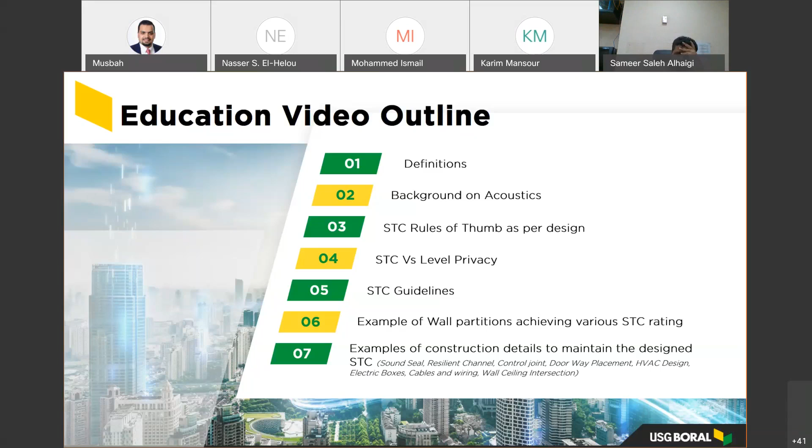However, this investment can yield important benefits such as happier tenants, higher property values, reduced turnovers and vacancies, and greater productivity. In this webinar, you will learn about acoustic definitions, background on acoustics, STC rules of thumb as per design, STC versus level of privacy, STC guidelines, and examples of wall partitions achieving various STC ratings. There will also be examples of construction details to maintain the designed STC, whether it's a seal detail, resilient channel installation detail, control joint detail, doorway placement, HVAC design details, electrical boxes, cables and wiring, and wall-ceiling intersection.

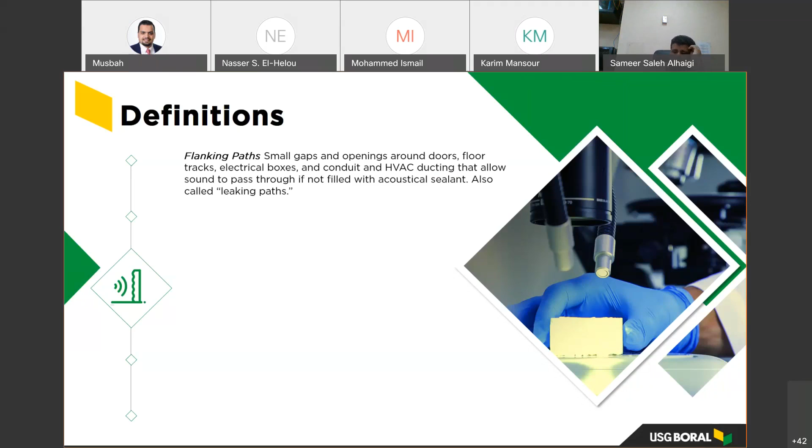Some of the most important terms and concepts to be familiar with in drywall acoustic design are flanking paths, which are small gaps and openings around doors, floor tracks, electrical boxes, conduit, and HVAC ducting that allow sound to pass through if not filled with acoustical sealant, also called leaking paths.

The second definition is the impact isolation class, also called IIC, which is the measurement of the ability of a floor-ceiling assembly to isolate sound from footfall or other impact sources, reducing the intrusion of noise into rooms directly below.

The third and important definition is the sound transmission class, which we will elaborate on more throughout our presentation. Sound transmission class stands for STC, which is the measurement of the ability of a wall or floor assembly to isolate airborne sound and prevent it from passing from one side to the other.

The frequency range to determine STC is from 125 to 4000 Hertz, and the STC is determined by ASTM E413.

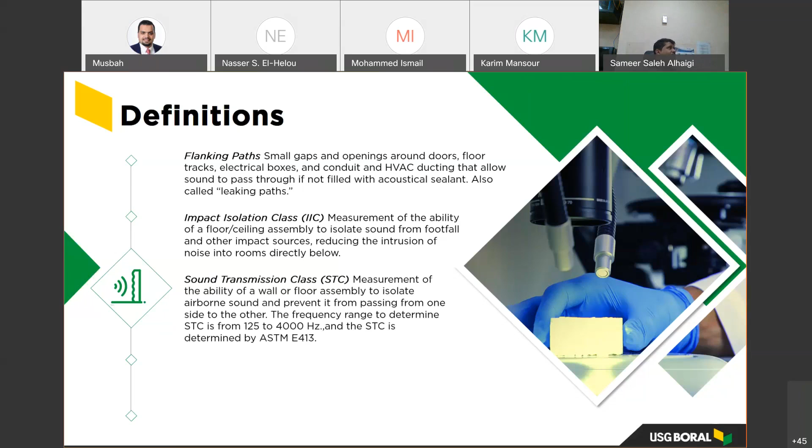RW is the weighted sound reduction index, where the frequency range to determine RW is from 100 to 3150 Hertz. From a curve, the RW is determined using ISO 717-1, and we will be giving an example of the graph and how to read the RW and the STC throughout the presentation. Note that whether a test is conducted to either ISO or ASTM, the RW or STC can be calculated.

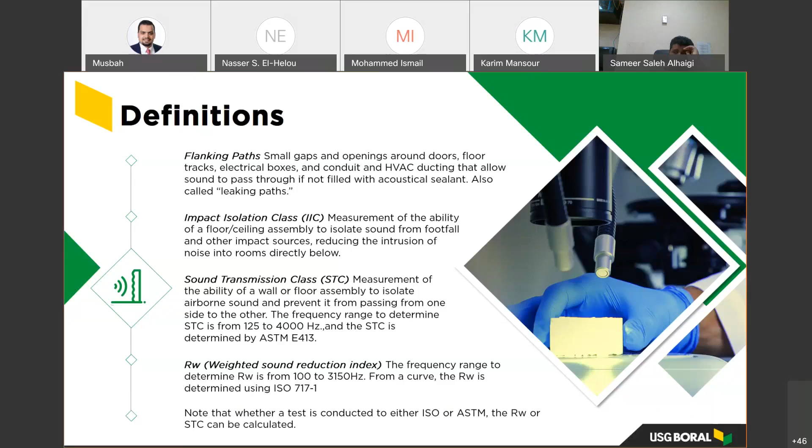While the science behind sound is well understood, using that science to create the desired acoustical quality within a building or room is complex. No single acoustical solution can be universally applied to all designs. Each environment features unique parameters the architect and designer must consider when developing floor plans, selecting materials, and designing assemblies.

Virtually every material, from furniture, wall and floor coverings to computer equipment, will affect sound to some degree. Designing wall partitions, ceiling systems, and floor ceiling assemblies for a distinctive quality of a space will achieve the most effective sound control.

Sound is defined as a vibration in an elastic medium, that is any material - air, water, physical object - that returns to its normal state after being deflected by an outside force, such as a sound vibration.

The more elastic a substance, the better it can conduct sound. Lead, for instance, is very inelastic and therefore a poor sound conductor. It's usually used in X-ray rooms of hospitals with gypsum board. Steel, on the other hand, is highly elastic, making it an excellent conductor of sound.

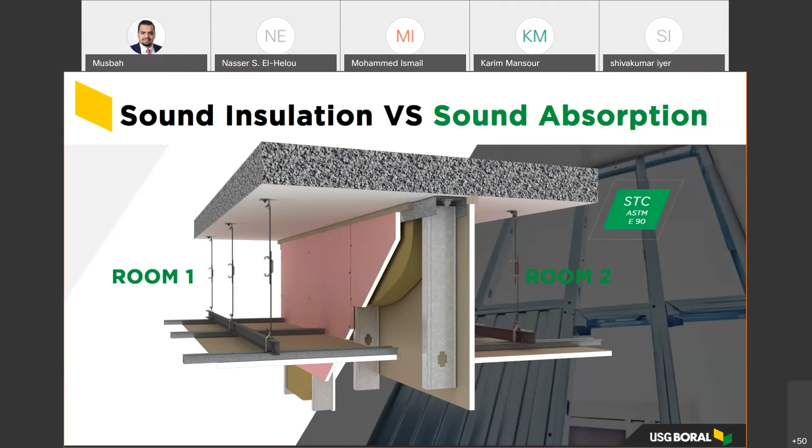Sound insulation relates to the actual reduction in sound traveling from one area to another through a wall, floor, or ceiling. Sound transmission class is the measurement of the ability of a wall assembly to isolate airborne sound and prevent it from passing from one side to the other.

You can measure these decibels using a special measurement tool. Inside the room, if you want to measure the sound inside the room, you get a machine. If you have a ringing phone and you measure it, it will give you 70 decibels, for example.

What is the basic concept of how acoustical walls work? We have already defined sound transmission class, STC, as the measurement of the ability of a wall assembly to isolate airborne sound and prevent it from passing from one side to the other.

When a wall has an STC of 25, normal speech can be heard easily. STC of 30, loud speech can be heard easily. STC of 35, loud speech can be heard but not understood. STC of 42, loud speech can be heard only as a murmur. STC 45, you must strain to hear loud speech. STC of 48, only some loud speech can be barely heard. STC of 50, loud speech cannot be heard.

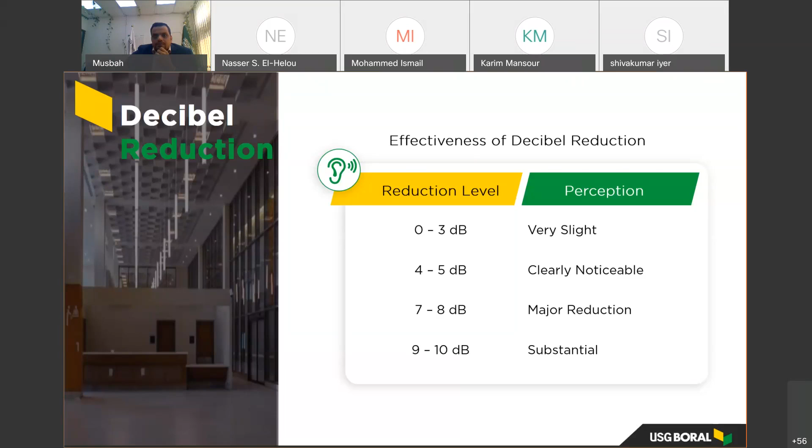If the reduction level is 4 to 5 decibels, it's clearly noticeable. If the reduction level is 7 to 8 decibels, then there's a major reduction in perception. Comparing a wall partition achieving 40 decibels to one achieving 50 decibels is a reduction level of 10 decibels, which has a substantial reduction in perception - very substantial when comparing a wall partition achieving 40 decibels to 50 decibels.

The frequency range to determine RW is from 100 to 3150 Hertz, and STC is from 125 to 4000 Hertz. In this example, at 500 Hertz, RW is 50 and STC is 49. This is a good example of why RW and STC differ. If the project acoustic specifications demand RW of 50, this wall could be offered. However, if STC 50 is required, you would need to offer a modified wall partition at a more expensive rate, since this wall partition achieves 49 decibel.

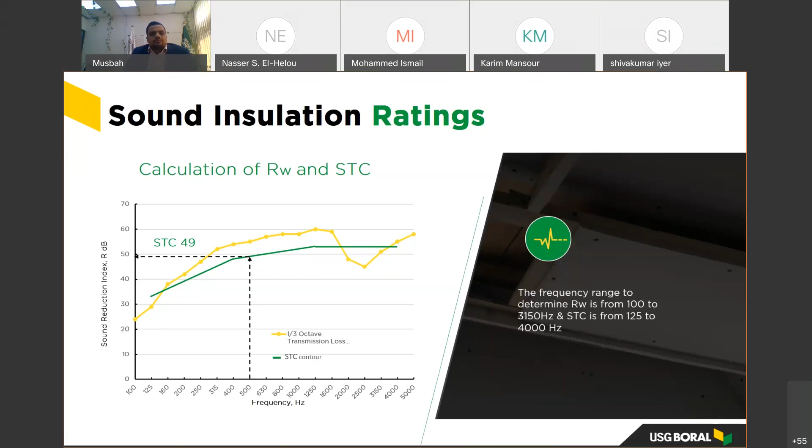Sound insulation ratings rule of thumb for STC and RW: in most cases, RW is approximately equal to STC. Note that STC and RW are lab results only. If a test is done to ASTM, both the STC and RW can be determined from the test results. Likewise, if a test is done to ISO, both RW and STC can be determined. The frequency range of STC determination is from 125 to 4000 Hertz, and RW is from 100 to 3150 Hertz. STC has the 8 decibel rule, which is maximum deficiency at one frequency. The 8 decibel rule is dropped for RW.

FSTC is determined in the field, and a lab test result will typically be higher by up to 5 decibel. This same wall tested in another project may achieve a different result because of different site conditions, and we will be discussing more about FSTC.

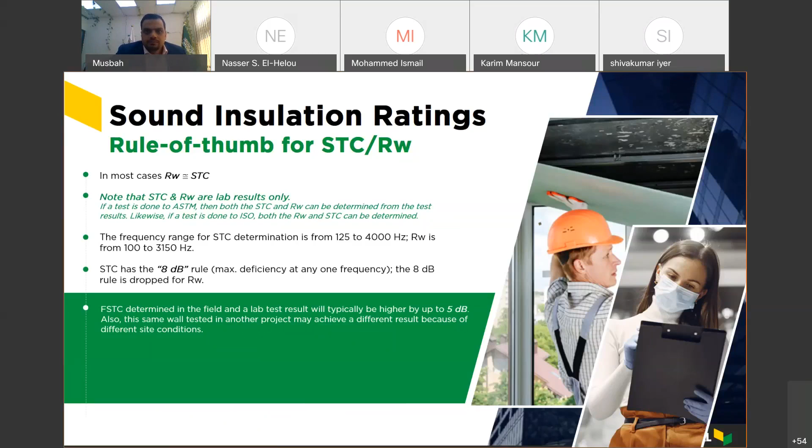ASTM E336 is the single number ratings test method for field sound transmission class (FSTC), noise isolation class (NIC), and normalized noise isolation class (NNIC). DNTW is the weighted sound level difference per ISO 717 and ISO 140 field test.

A wall partition will achieve an FSTC on site approximately 10% less than the STC tested in the lab. For example, if you have a tested wall assembly in the lab achieving 55 decibel, when tested on site it will achieve an FSTC of 50. Likewise, 66 decibel tested in the lab will give you an FSTC of 60.

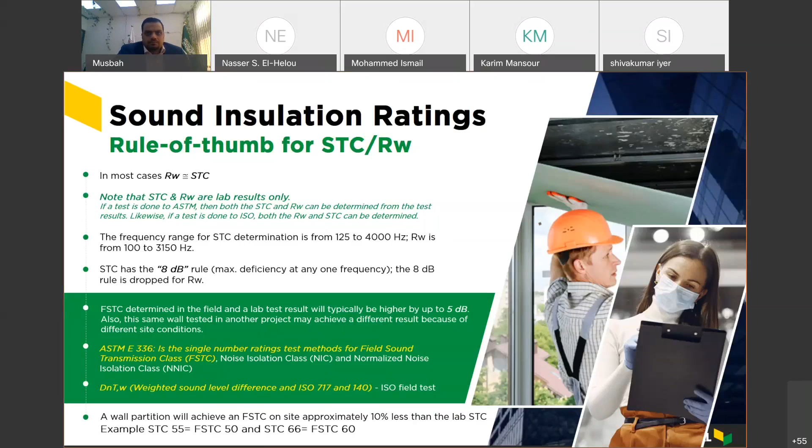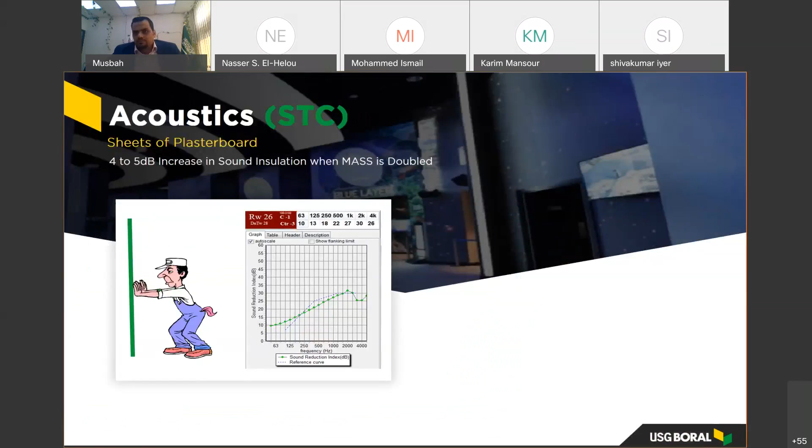Have you ever asked yourself how a wall partition's acoustical performance is affected when you double the layers of gypsum, thus doubling the mass? When mass is doubled, sound insulation increases by 4 to 5 decibel.

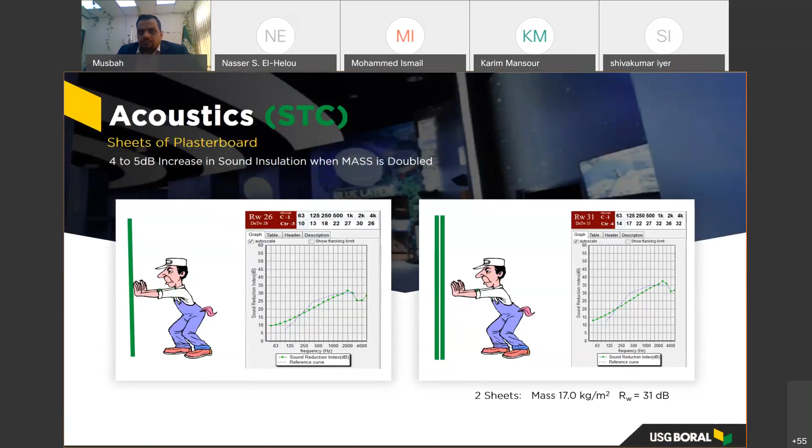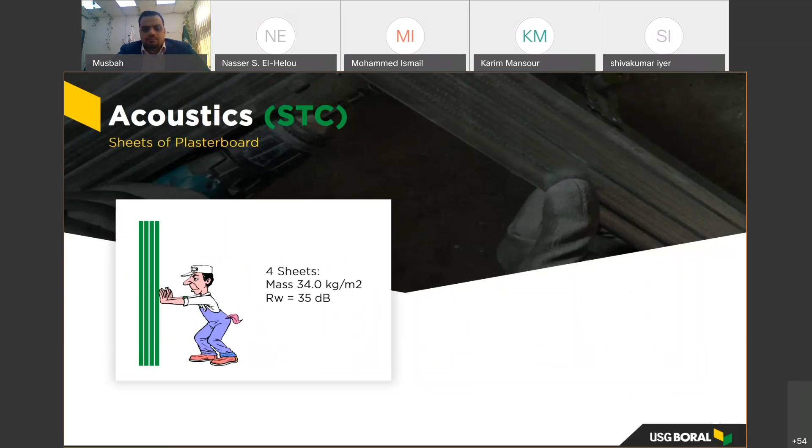2 layers of gypsum board would give you a 31 decibel rating. When we double the layers to 4 sheets, we now have a mass of 34 kilograms per meter square, which is 4 times the mass of each layer of gypsum board. The rating becomes 35 decibel. By doubling to 8 sheets, you get an acoustical performance of 40 decibel, and the mass of the system went from 34 up to 68 because we doubled the sheets and doubled the mass. We gained 5 decibel acoustical rating.

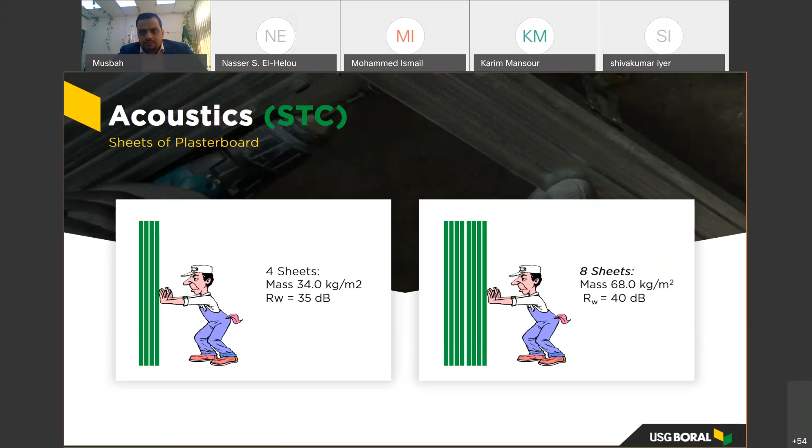Consequently, having 16 sheets will give you an acoustical performance of 45 decibel, and 49 decibel for 32 sheets of gypsum. However, in real life, you don't see a wall partition composed of 32 sheets, and you don't put 32 sheets of gypsum board next to each other. Typically, a wall partition is composed of steel framing separating the gypsum board and insulation in order to increase the acoustical performance, so you will never see 32 sheets next to each other.

There are more factors that we are going to talk about in the STC rule of thumb design as we continue.

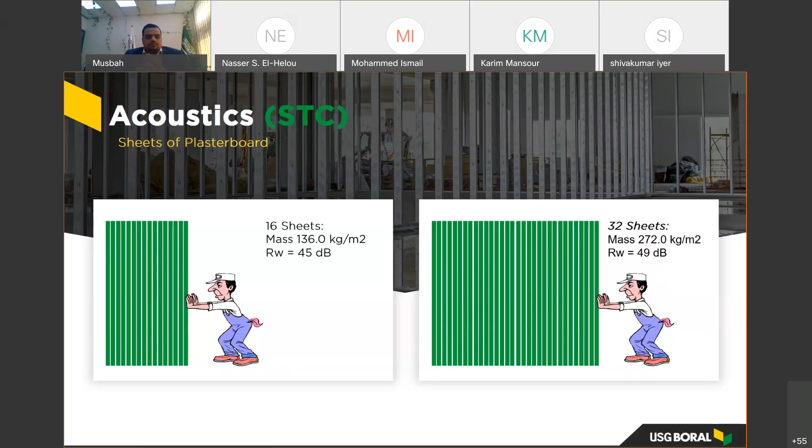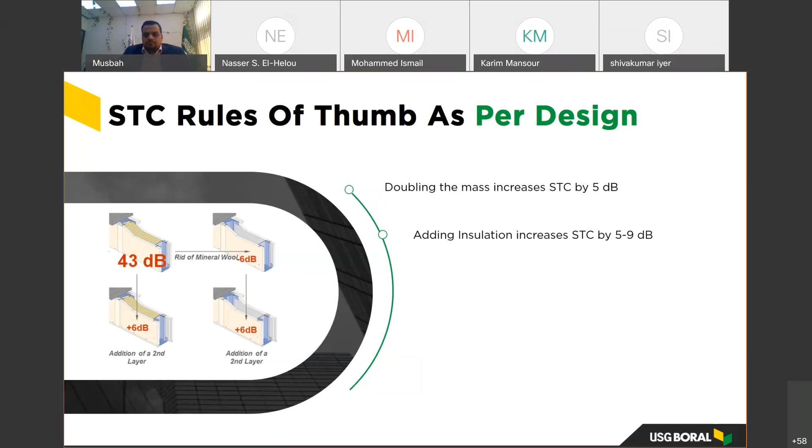Adding insulation: when we got rid of the insulation, we lost 6 decibel. Adding insulation back to this wall partition will give you an increase of 5 to 9 decibel, depending on the thickness of the insulation, the density of the insulation, and the type of insulation used, whether it's fiberglass, stone wool, or mineral wool. However, having insulation in the wall partition will definitely benefit the acoustical performance of your wall partition by 5 to 9 decibel.

Steel studs at lower gauge: let's say you have a steel stud that is 0.6 millimeter thick. They perform better than higher gauge steel studs or wood studs. If you have a higher gauge stud of 0.9, the 0.6 millimeter steel stud will perform better acoustically as a system than the 0.9 millimeter stud. From 0.6 to 0.9, you actually pass through 0.7, 0.8, to reach 0.9.

For each 0.1 increase, you're actually losing 1 decibel. So having a wall partition with studs of 0.7 will be 1 decibel less than having a wall partition with 0.6. Likewise, for 0.8 it will be 2 decibel less, and for 0.9 it will be 3 decibel less. This is just a rule of thumb, as we mentioned earlier, since sound travels differently through air, steel framing, and wood, each in a different manner.

Adding a resilient channel will increase STC by 5 decibels. We'll see an example of a wall partition where adding a resilient channel gained 5 decibels. However, we'll also see the proper installation detail of a resilient channel, because if it's improperly installed, it will not give you that 5 decibel increase. So there's a proper way of installing a resilient channel.

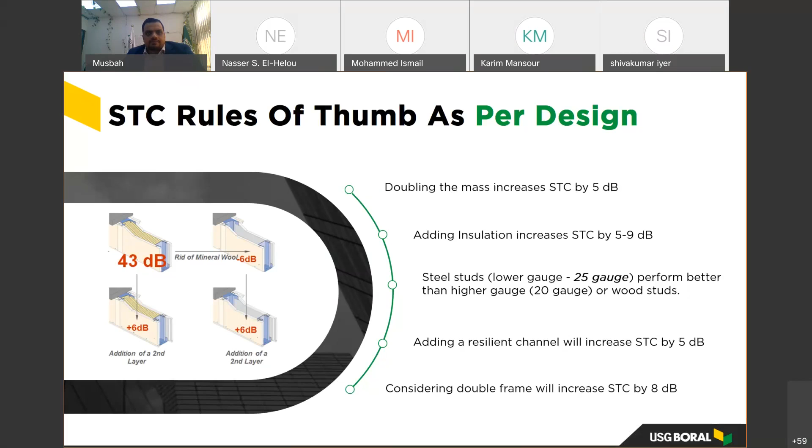How does STC relate to privacy? A wall partition achieving 45 decibel acoustical performance has a normal degree of privacy, where normal voices in the adjacent space are audible and intelligible some of the time. Raised voices and speakerphones are mostly intelligible.

A wall partition achieving 50 decibel acoustical performance has a good degree of privacy, where normal voices in the adjacent space are barely audible but unintelligible most of the time. Raised voices and speakerphones are partially intelligible.

A wall partition achieving 55 decibel acoustical performance has an excellent degree of privacy, where normal voices in the adjacent space are mostly inaudible. Raised voices and speakerphones are audible but unintelligible most of the time.

A wall partition achieving 60 decibels and plus has an acoustical performance considered a confidential degree of privacy, where normal voices in adjacent spaces are not audible. Raised voices and speakerphones are barely audible but not intelligible.

You might ask yourself, based on what do I select the components of a wall partition to achieve a certain STC rating? For example, what should be the STC rating of a wall partition between areas in a cinema? Or between a classroom and offices in an educational facility? Based on many standards, there should be an STC guideline depending on the type of building being constructed. USG Middle East has developed STC guidelines for various types of buildings.

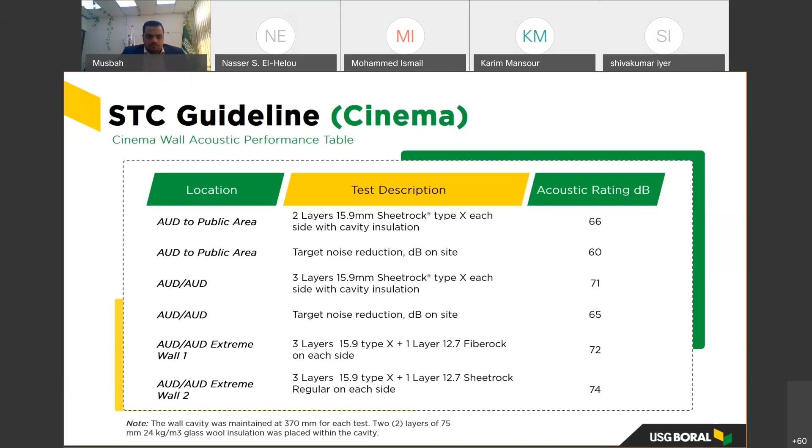You can also see all the details of the wall partitions for cinemas in the cinema guide posted on our USGME website, for walls as well as ceilings. Products from USG Middle East for your ceilings and walls are posted on our website and in the guide as well.

When considering an educational facility, the minimum acoustic rating between 2 classrooms shall be 45 decibels, whereas between 2 music rooms the acoustic rating reaches a confidential degree of privacy, as mentioned earlier, of 60 decibels. You can go through this acoustic guideline at any time using our educational institution guide.

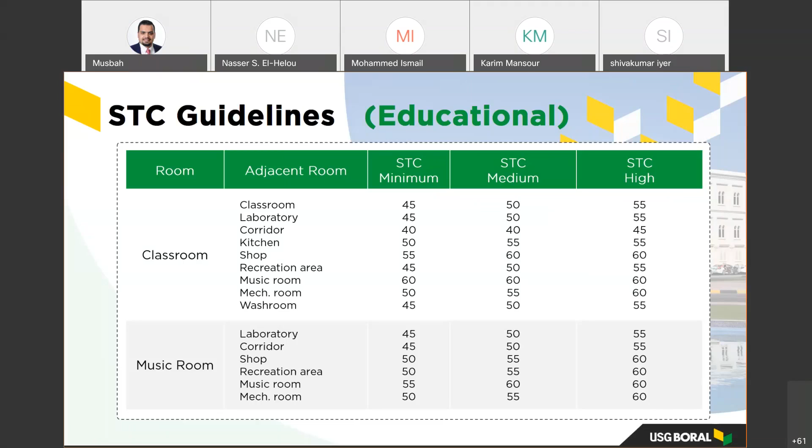When considering businesses, the minimum acoustic rating between 2 offices shall be 45 decibel, and the maximum acoustic rating between general area or conference room and kitchen shall be 55 decibel.

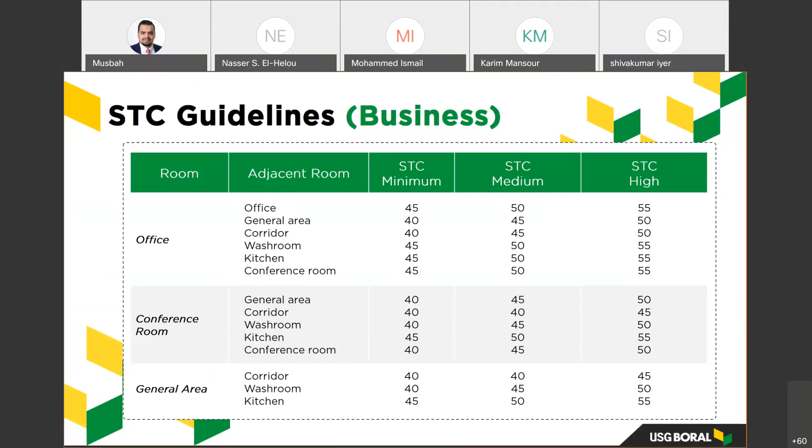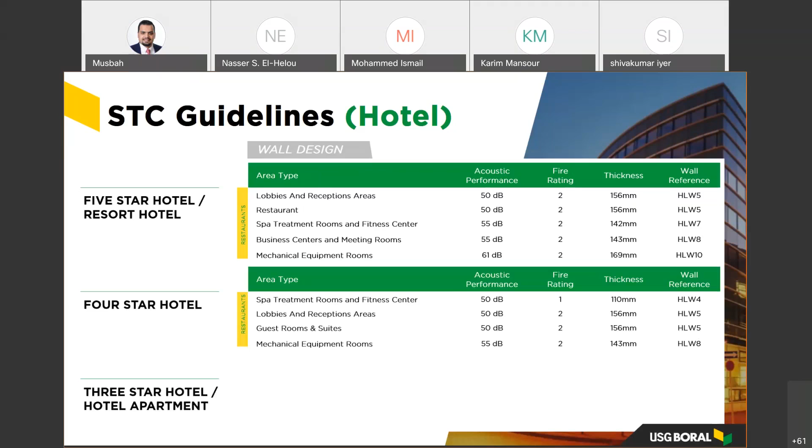When considering hotels, please note that the acoustic performance differs depending on the hotel star rating. As shown in the STC guideline in the hotel's guide, 5-star hotels have a more stringent acoustical performance than 4-star and 3-star hotels. Acoustic rating between restaurants and mechanical equipment rooms is the highest for 5-star hotels at 61 decibel. Moreover, acoustic rating between restaurants and lobbies and reception areas is 50 decibel for 5-star and 4-star hotels.

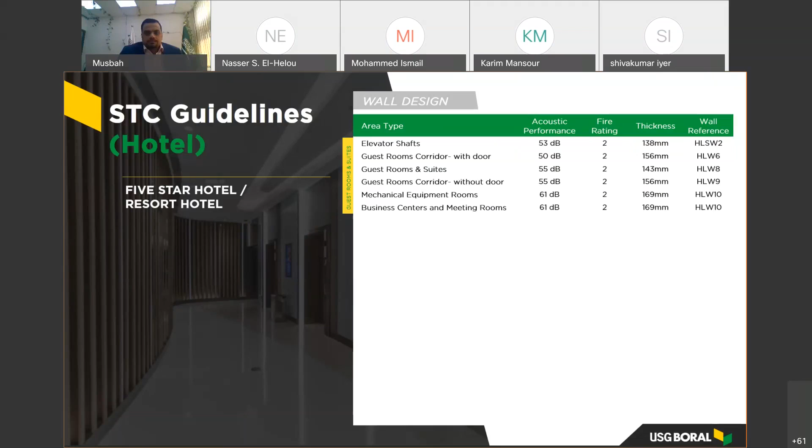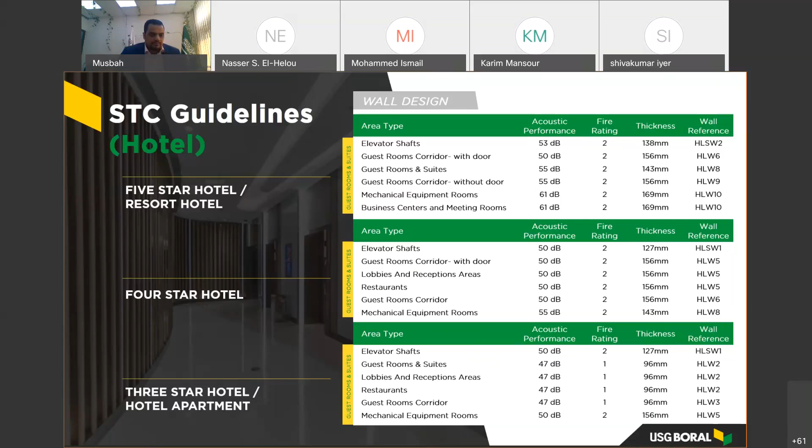Other rooms have other requirements and are represented by different wall types. For full information related to hospitals and description of wall partition types, please visit our website www.usgme.com and download USG Middle East Healthcare Guide, where you won't only see the wall partitions, you will also see the special healthcare ceilings that are available to you from USG Middle East.

Healthcare ceilings achieving different criteria.

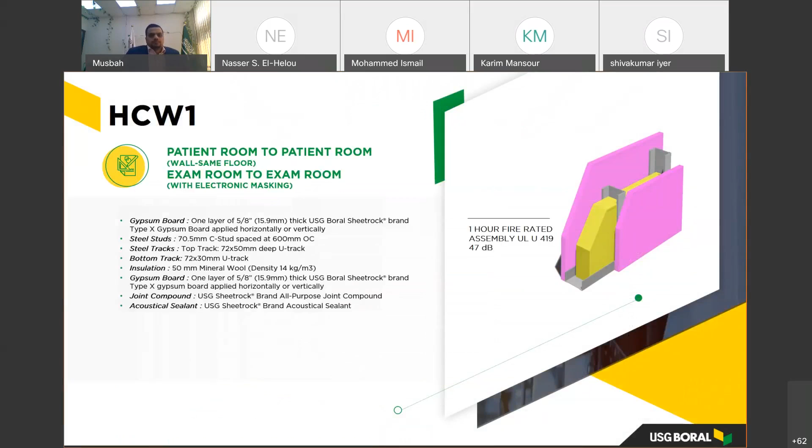Here you can see an example showing the components of healthcare wall 1, HCW1, which gives an acoustic rating of 47 decibel and a fire rating of 1 hour. This wall partition is composed of 1 layer of 15.9 millimeter sheetrock brand type X gypsum board applied horizontally or vertically on 70.5 millimeter C-studs spaced at 600 millimeter on center.

You see the system wall thickness is around 96 millimeter, including the steel framing and the gypsum board. It achieves 1 hour fire rating as per UL U419. And it's composed of all these accessory items.

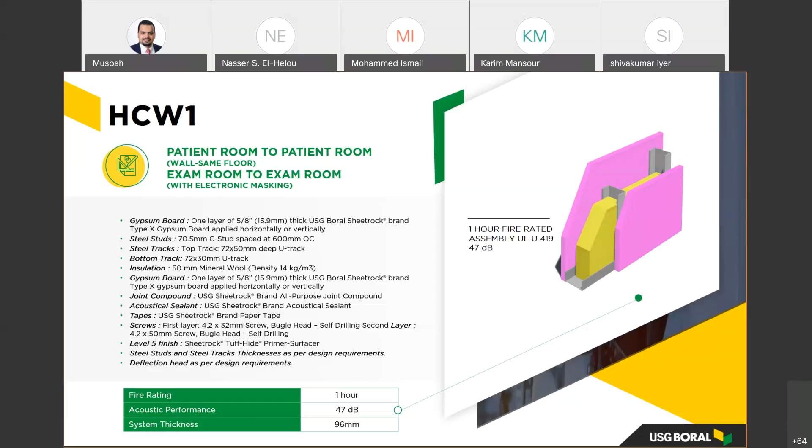When you have a tested wall partition for acoustics and for fire, you have the full components of the system, whether it's the sealant, whether it's the screw, the tapes, the joint compound, the gypsum board, the steel framing - all the components you will have as one assembly. This is an assembly containing all these components to achieve the acoustical performance required.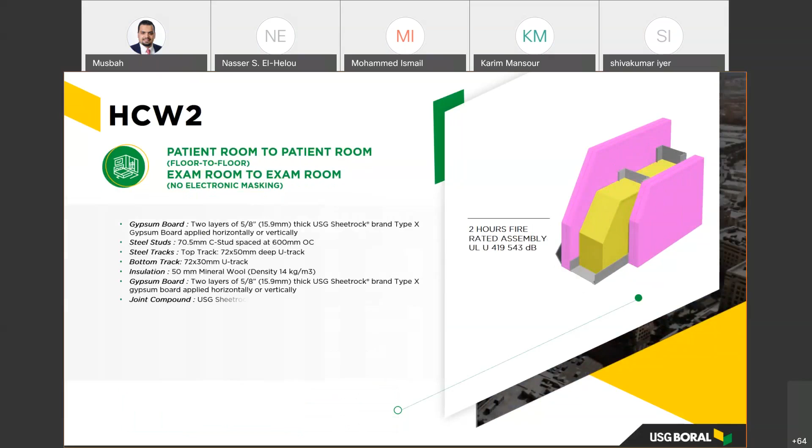Even in wet areas of healthcare applications, there's a special wall partition HCW5 achieving an acoustical rating of 50 decibel.

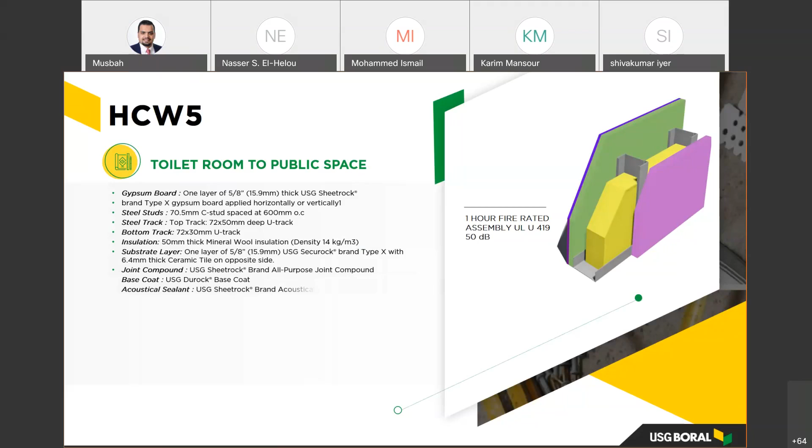Here is HCW7, where you see the addition of the resilient channel. We saw previously the wall partition with 2 layers of gypsum board achieving 2 hours fire rating and 56 decibel. When we added the resilient channel, we gained 5 decibel, which is 56 plus 5, 61 decibel.

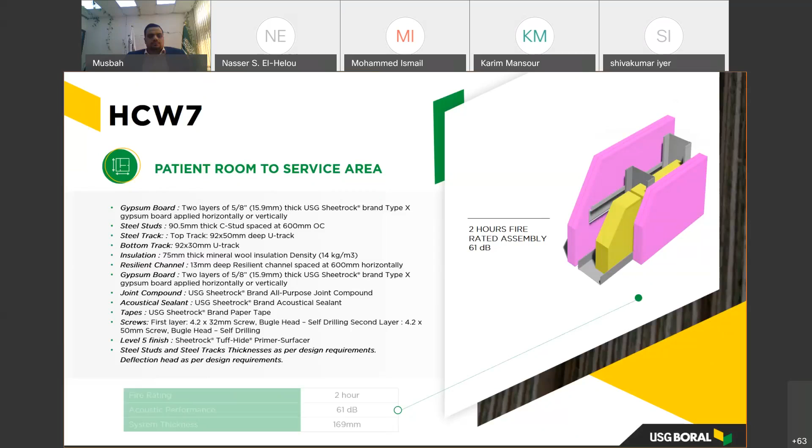You can refer to all these wall partitions from USG Middle East website, www.usgme.com.

Installation plays a critical role to achieve the required design. In the following examples, we will be highlighting some proper installation practices to maintain the design and performance. You might design a wall partition to have an STC of 50 or 55. However, if not sealed properly beneath the track and the gypsum layers, the STC might drop to 29. We conclude that proper installation is crucial to maintain the required design intent.

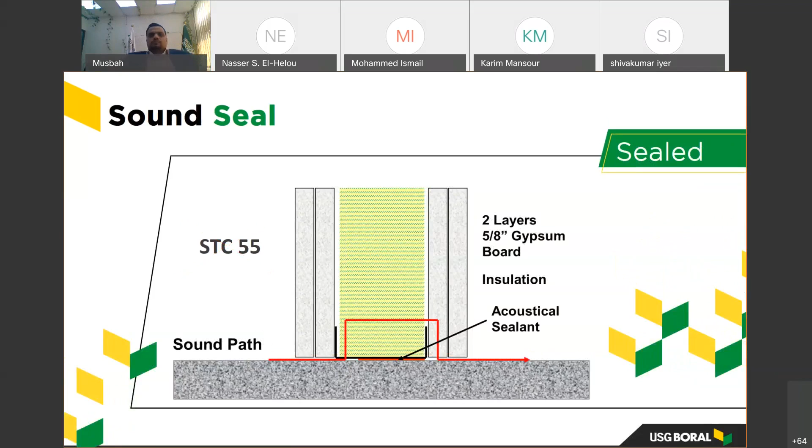Here you can see that you should place acoustical sealant beneath the track and below the first layer of gypsum board.

As we mentioned earlier, adding a resilient channel enhances the acoustical performance by almost 5 decibel. However, if the screw going through the gypsum board and the resilient channel is installed improperly, going all the way through the stud, then a short circuit will happen and you won't benefit from the addition of the resilient channel. The first figure illustrates the resilient channel installation to avoid, and the second illustrates the correct method of installation. Remember, improperly installing a small item like a screw might have a major impact on the acoustic design of a wall partition.

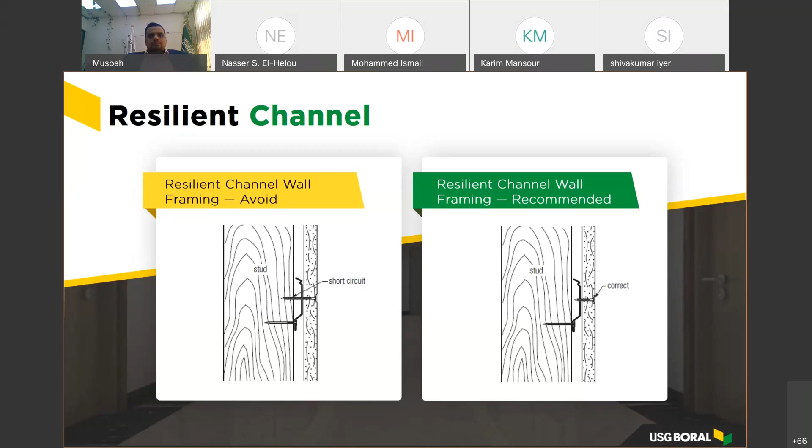In this slide, you can see the proper way of installation of a control joint in case you have a 1 hour fire rated wall partition as illustrated, where you can put 2 cut pieces of Sheetrock brand Firecode core panels in the cavity behind the studs, as in the first figure, or compressed insulation as in the second figure.

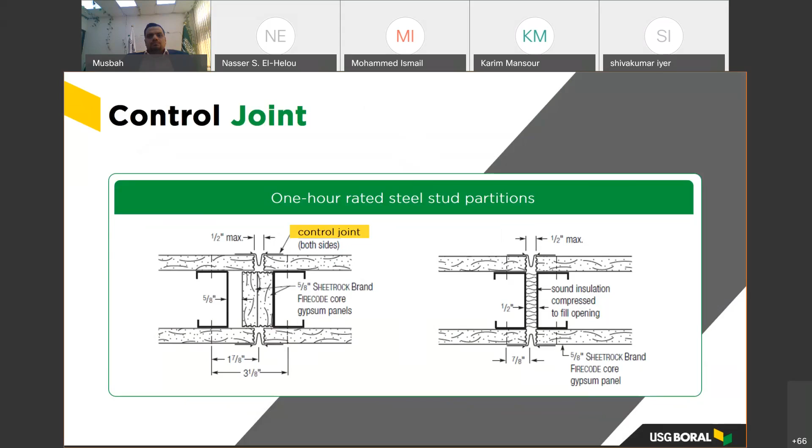Even doorway placement during a design would impact the acoustic design. The first figure illustrates doorway placement to be avoided, and the second figure illustrates a better doorway placement, where it is harder for sound to propagate from one room to the other as the doors are not facing each other, as in the figure.

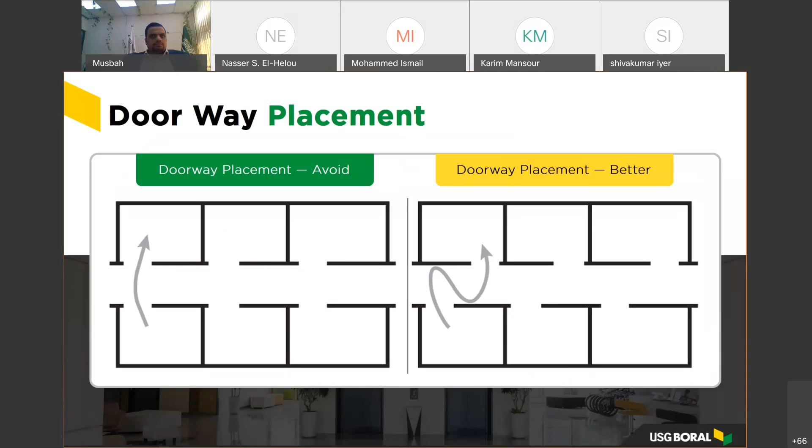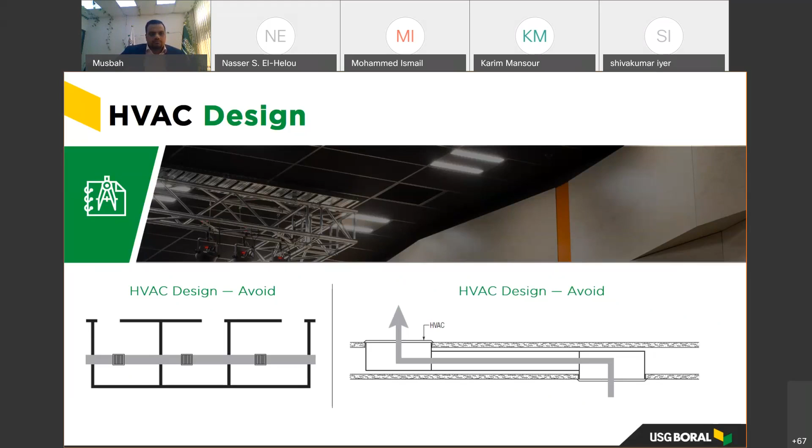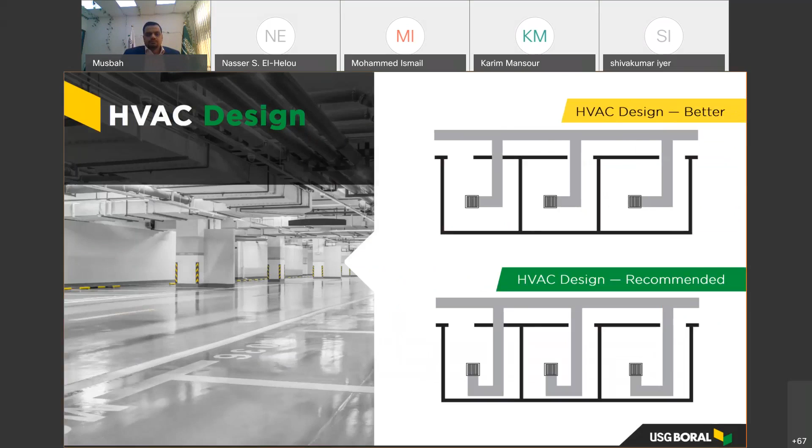The sound wave gets broken the most and dissipates. When installing a cabinet between 2 studs, a gypsum panel shall be installed on the back of the studs behind the cabinet to accommodate for the loss of the gypsum board face layer.

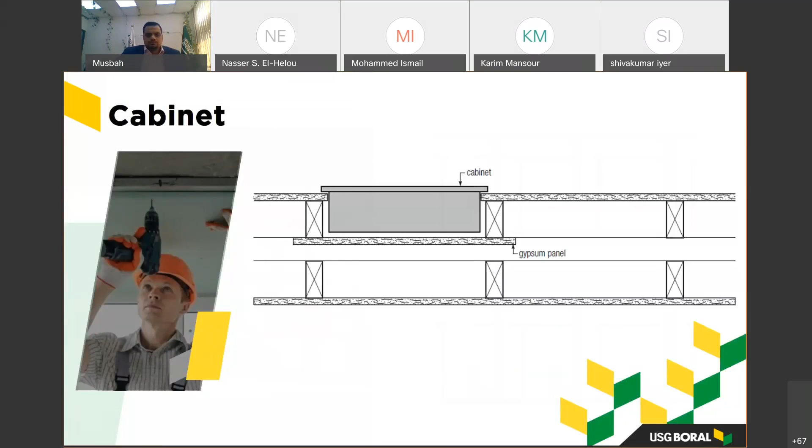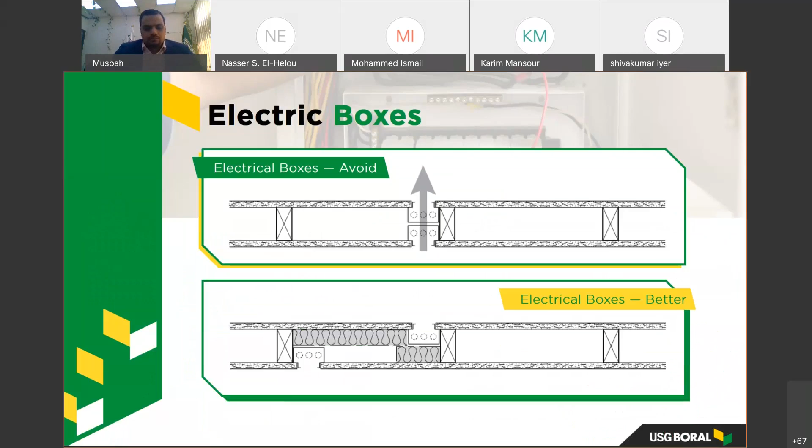Electrical boxes shall be staggered as shown in the second figure, and the installation in the first figure should be avoided. The recommended electrical box installation shall be as illustrated here, with 24-inch or 600 millimeter minimum separation.

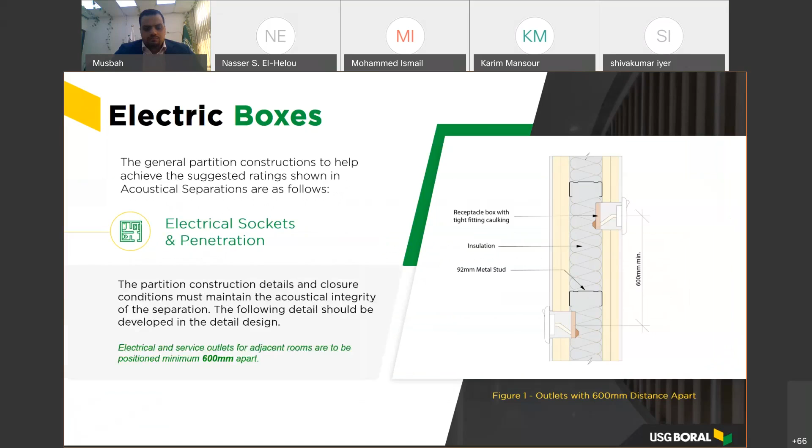The general partition construction to help achieve the suggested ratings shown in acoustical separations are as follows: how to install electrical sockets and penetrations. The partition construction details and closure conditions must maintain the acoustical integrity of the separation. The following details should be developed in the detail design.

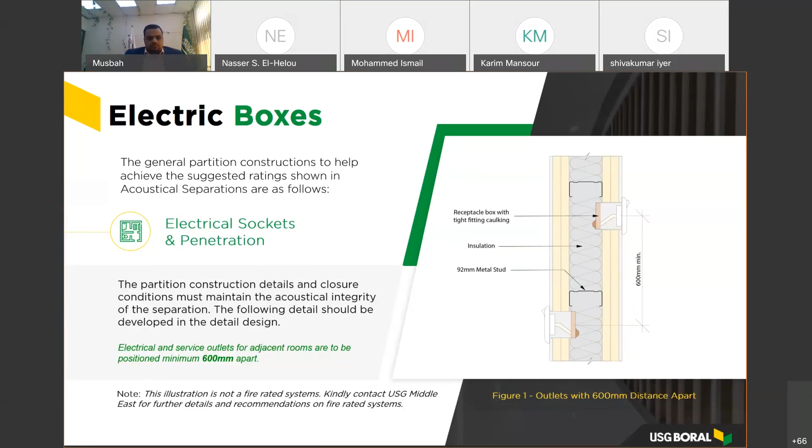If the electrical and service outlets are positioned less than 600 millimeters apart. The outlet boxes shall be enclosed by 2 layers of gypsum board with a loaded vinyl layer at the perimeter of the socket box.

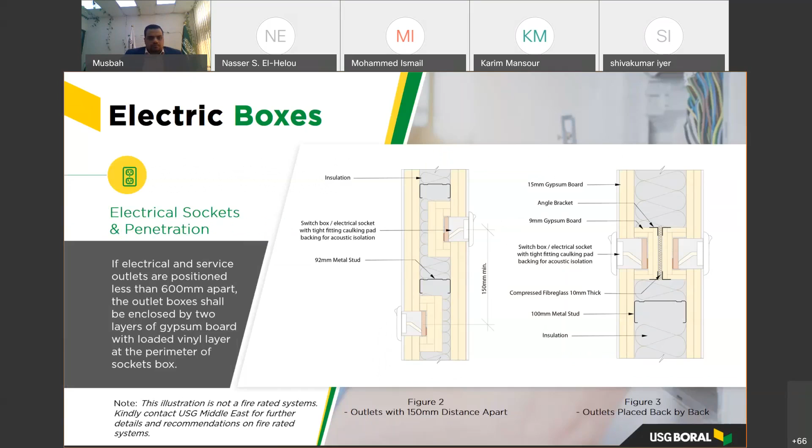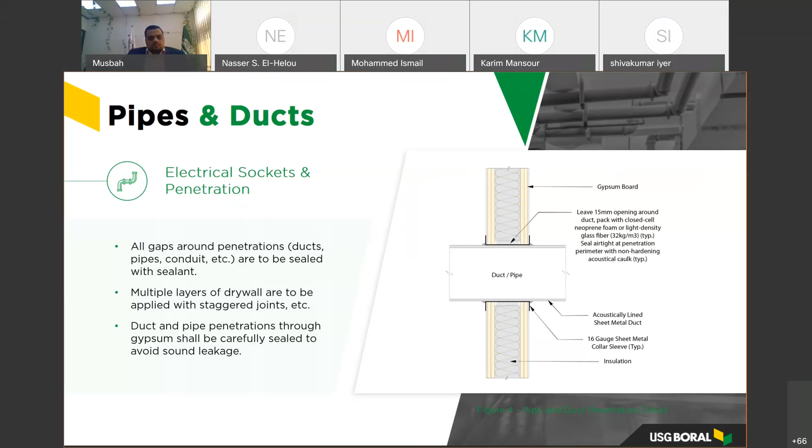As for pipes and ducts, all gaps around penetrations, duct pipes, and conduit are to be sealed with sealant. Multiple layers of drywall are to be applied with staggered joints. Duct and pipe penetrations through gypsum shall be carefully sealed to avoid sound leakage.

When considering cabling and wiring, all gaps around penetrations, ducts, pipes, and conduits are to be sealed as follows: a 25 millimeter or less gap filled tightly with batt insulation and/or fire sealant, and gaps larger than 25 millimeters filled with heavy density putty. Fire ratings of materials are to be verified also by professionals.

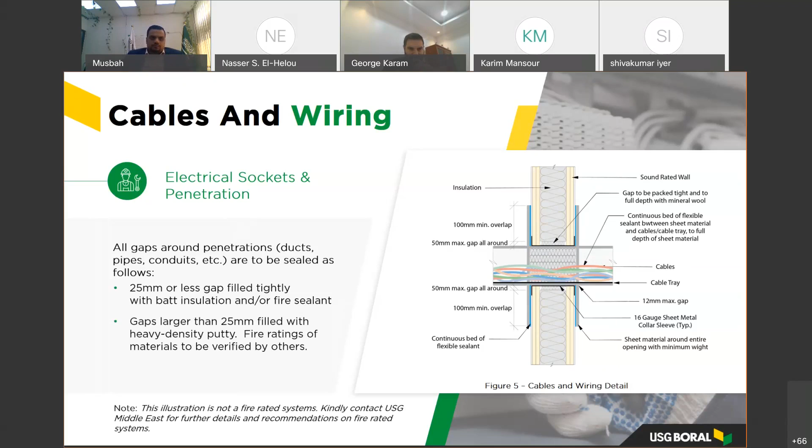What about the intersections between walls and ceilings in case the wall is not reaching all the way to the soffit? On top of the freestanding wall partition, there shall be a compressible gasket between the T-grid and the top track of the wall partition. In case of a concealed ceiling, the design detail will be as illustrated in the second figure.

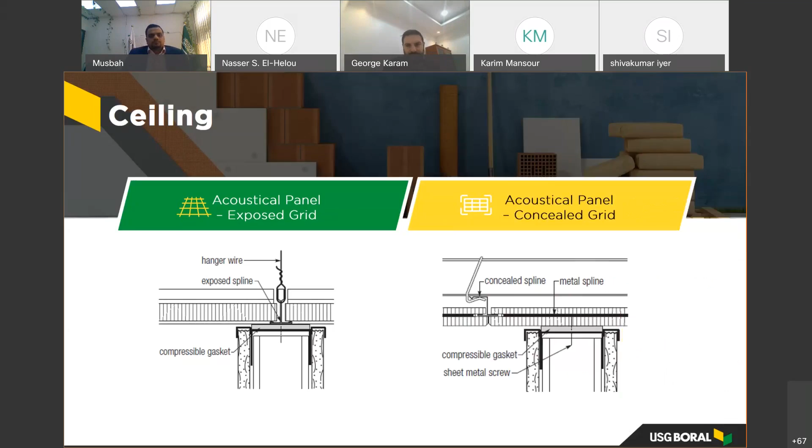What are the walls and ceilings STC and CAC rules of thumb? How is the STC related to CAC when you have a drywall partition and the ceiling as well? As a rough guide to ensure the acoustical performance of a wall is not degraded significantly by the flanking path over the partition through the ceiling, the CAC of a ceiling should be a minimum 3 decibels higher than the RW of the wall. For example, an RW 40 dividing wall requires a minimum CAC of 43 decibel ceiling.

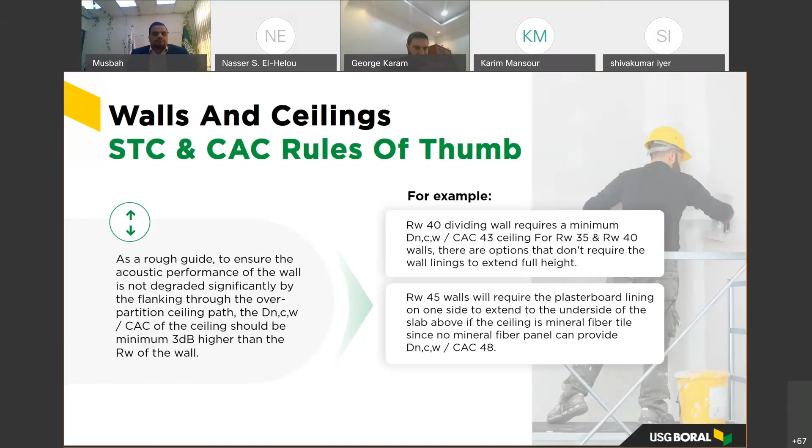For RW 35 and 40 walls, there are options that don't require the wall linings to extend full height. RW 45 walls will require the plasterboard lining on one side to extend to the underside of the slab above the ceiling, as if the ceiling is mineral fiber, since there is no mineral fiber panel that can provide a CAC of 48 decibels. RW 50 will require the plasterboard linings on both sides to extend to the underside of the slab above.

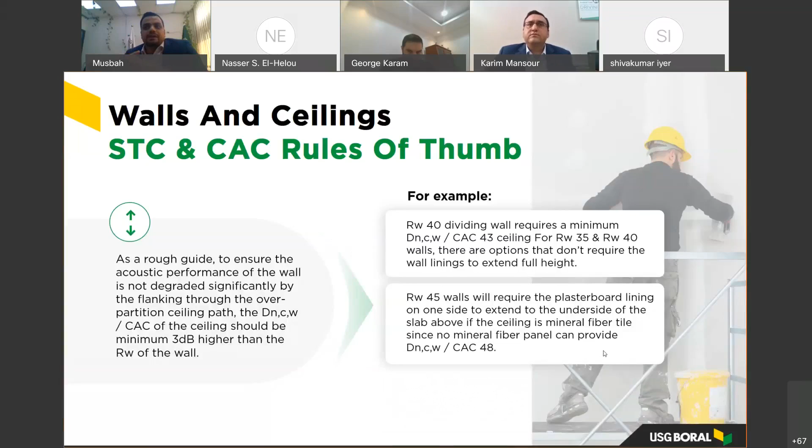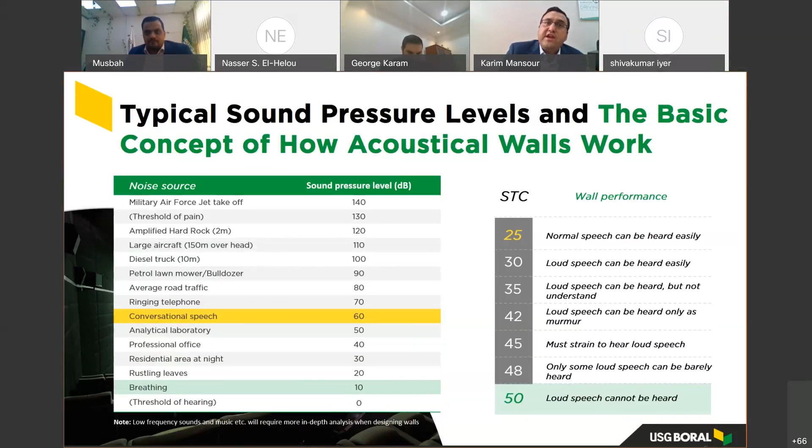Yeah, I'm sorry, I don't actually agree with that. Gerald Stewart here, Secretary of the Middle East Acoustic Society, Principal Acoustician at Inhabit Group. 60 minus 50 equals 10 is not the correct assimilation. The STC curve is a curve fit, so there are different sound levels that occur at different points in time and at different frequencies. So the assimilation is not correct, it's not just a straight this-minus-this-equals-this. And the second part of that, to hear breathing in another room at 10 dB, you would probably have to have something like an STC or Rw of 80 or 100 wall, because at a breathing level of 10 dB you're effectively in an anechoic chamber.

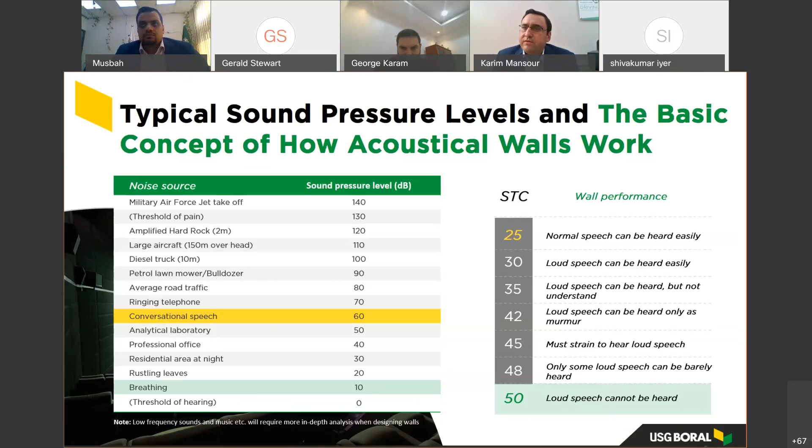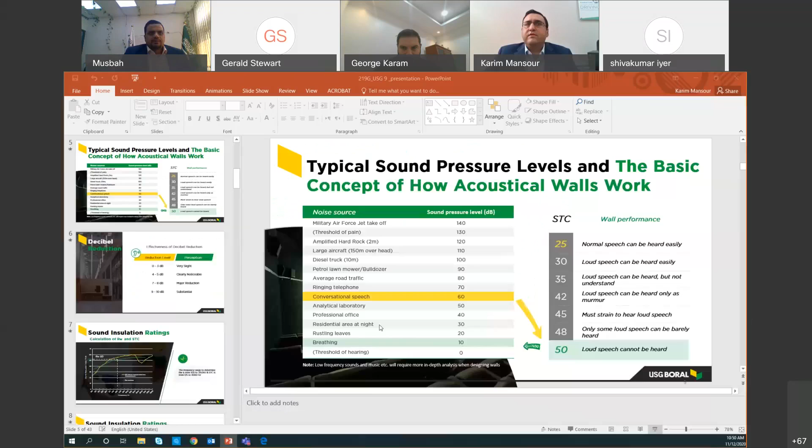I just don't agree with the slide, I'm sorry. But however, you did correct it in a later slide, where you said that a 50 means loud speech can be heard. If you go about 4 slides later, you said 50 means loud speech can be heard, and 60 is in the privacy rating section. If you go into the privacy rating section, STC, yes, that's the one. You've got then a 60 plus where normal voices in adjacent spaces are not audible, but raised voices and speakers are barely audible. So you've actually corrected yourself in that slide. Your first slide, slide 5, is wrong. This slide is more accurate.

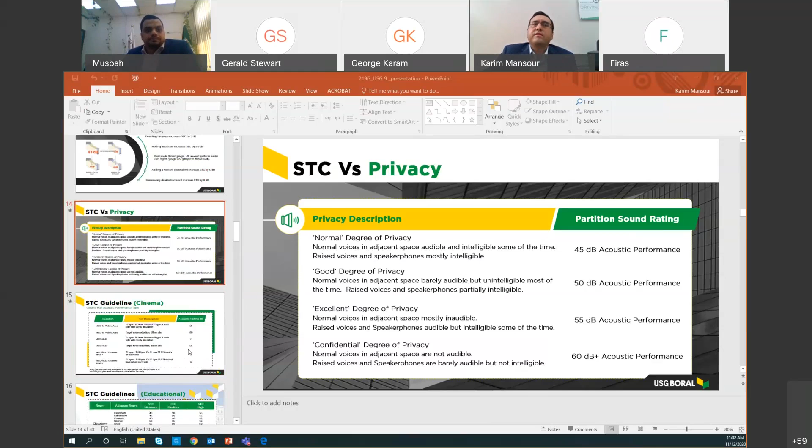As we mentioned, the requirements of 5-star hotels are more stringent in acoustics than 4-star or 3-star hotels, where 3-star hotels have the least requirements. So the wall partitions differ from 5-star hotels to 4-star and 3-star hotels. So the STC requirement will vary? Yes, it will vary.

Another question from Mr. Borno Tayo: I want to know if the values of partition sound rating are standardized. Is there any standardization for the STC guides?

Each company, when they test their assemblies, gets different values. It's as per the test result that you will be getting, but the assembly will differ from one manufacturer to the other. However, as per the building and international building codes, we base our guidelines on the international building codes available. For example, the FGI code 2018 for healthcare applications gives you how much the wall partition assembly should be between patient room and patient room, and it's stated in our healthcare guide. So there are some norms and standards to follow.